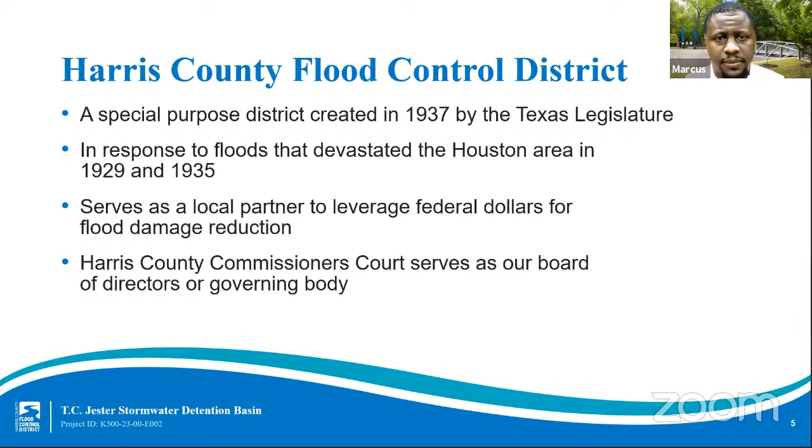The mission of the Harris County Flood Control District is to provide flood damage reduction projects that work with appropriate regard for community and natural values. One of the most difficult challenges we face is constructing effective projects that are sensitive to community and natural values in highly urbanized areas.

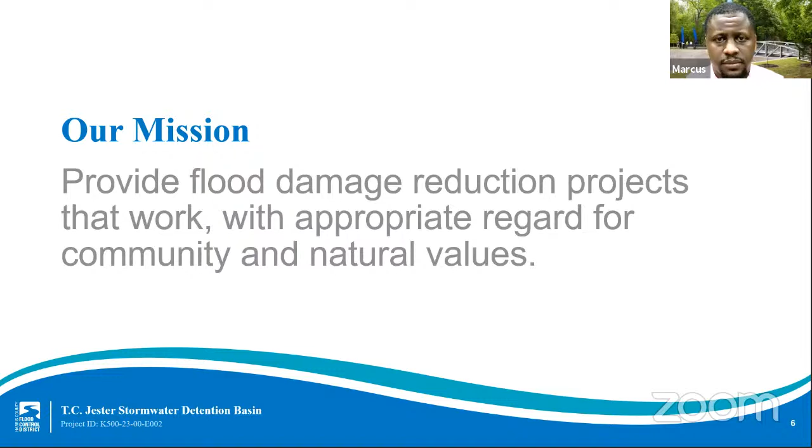Harris County includes 22 main watersheds, totaling approximately 1,800 square miles and more than 2,500 linear miles of channel. 2,500 miles is approximately the distance from New York to California. A watershed is a geographical region of land that drains to a channel or an outlet. Each watershed has its own unique characteristics and needs. The project we're presenting tonight is in the Cypress Creek watershed.

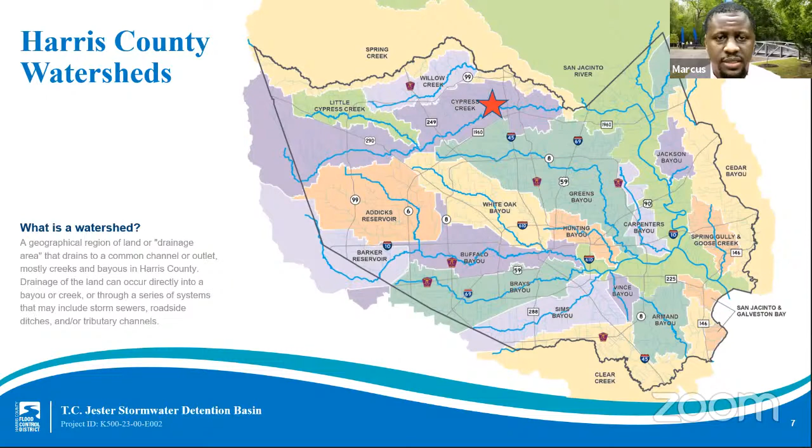Our area is flood prone, and here are some reasons why. We experience extreme rainfalls, including tropical storms and hurricanes. We have flat, slow draining topography, and we have clay soils that do not easily soak up excess rainfall.

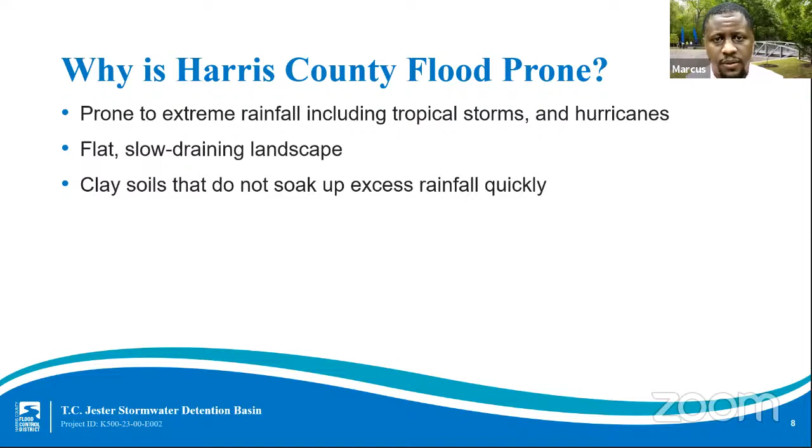When storm sewers are increased, this increases runoff. Since it is our policy to avoid impacts to downstream properties, detention basins help to safely take in and temporarily store excess stormwater during heavy rain events. Often, we partner with Harris County precincts, utility districts, and others to add recreational amenities such as trails to these basins and along our channels.

On August 25th, 2018, Harris County voters approved $2.5 billion for flood risk reduction projects. This vote followed a series of meetings across Harris County in each watershed, which resulted in a list of what is now 181 bond projects. 160 of those 181 bond projects have been initiated so far, including 12 projects in the Cypress Creek watershed.

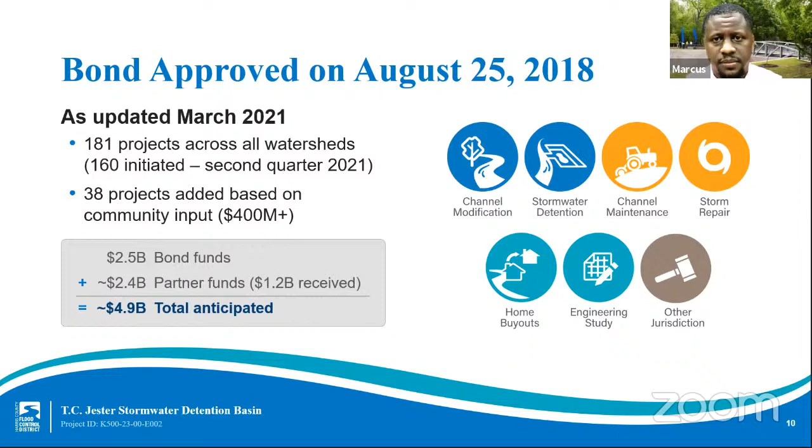While the bond was for $2.5 billion, the full cost to construct every project in the bond table is almost $5 billion. So we made it clear from the outset that we would need partner funding to fully construct the projects in the bond program. And as I mentioned previously, we've had some success with obtaining $1.2 billion in partner funds.

As this graphic illustrates, it shows the many sources of partnership funding, including federal, state, and local funding the Harris County Flood Control District is working to secure for Harris County. Each agency has its own definition of eligible projects and its own requirements for local match funding. So the Flood Control District is working diligently to match projects to the right partnership opportunities.

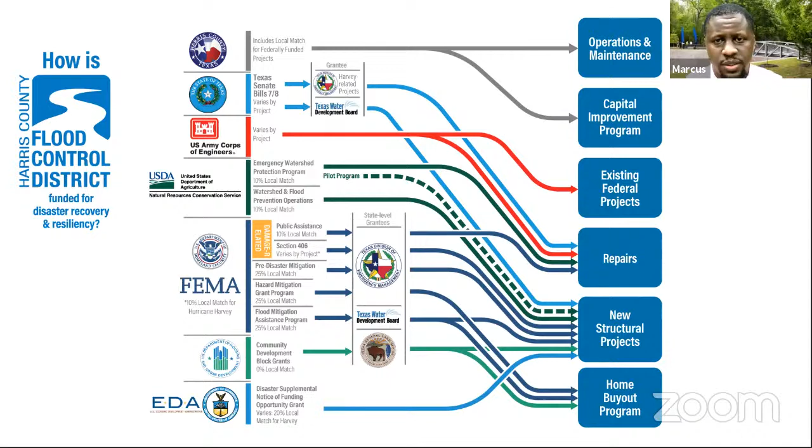We'll now move into the part of the program that's specific to the Cypress Creek watershed and TC Jester Stormwater Detention Basin. As with much of our region, this watershed has historically experienced storm events that produce heavy rains and cause frequent flooding. Most recently, as you may remember, flooding of Hurricane Harvey in August 2017. In the Cypress Creek watershed, the 4-day Harvey rainfall total was 29.3 inches, which resulted in record flooding along Cypress Creek and many of its tributaries.

The Cypress Creek watershed is also one of the most highly developed in the county, and much of that development occurred before regulations around on-site stormwater detention were in place. This creates a unique challenge when proposing flood risk reduction projects in the area.

A regional study for Cypress Creek watershed found flooding along tributaries of Cypress Creek is predominantly caused by the rising of Cypress Creek and backing up into those tributaries, not the lack of sufficient stormwater conveyance or drainage capacity by the tributaries themselves. Therefore, the study recommended nearly 25,000 acre-feet of additional stormwater detention in the watershed to reduce that backwater issue.

We're often asked, why don't we simply enlarge Cypress Creek itself? The answer is complicated, but basically it's because it's a federally protected natural stream. Widening or deepening it would be very expensive for multiple reasons and would require buying out and demolishing homes and businesses all along the creek, which is very disruptive for the community.

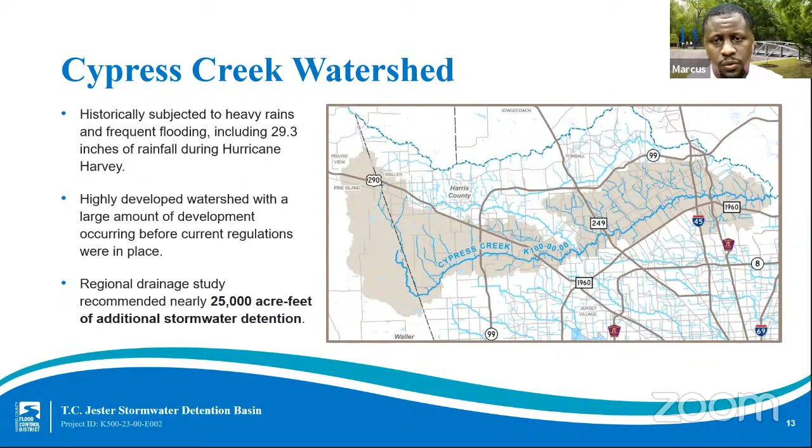Because the previously mentioned study recommends 25,000 acre-feet of detention, we're primarily focused on constructing stormwater detention in the Cypress Creek watershed. Of course, being such a developed watershed, we also acquire right-of-way wherever we can along the creek to preserve and restore natural floodplains or for future projects. The Cypress Creek watershed has its own bond ID for right-of-way acquisition.

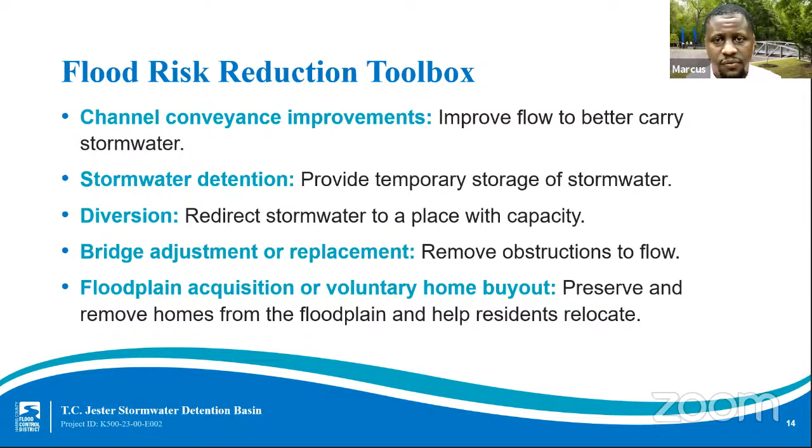A stormwater detention basin is built to store excess stormwater until it can safely make its way back into the channel and then ultimately to Galveston Bay. There are several ways stormwater will fill the basin, but all of our structures are passive designs that utilize gravity to operate, so there are no mechanical pumps or gates.

The flood control district typically constructs two types of basins, wet bottom and dry bottom. Both wet and dry bottom fill up during heavy rain events and then drain out as the receiving channel recedes. The difference is that one has a permanent pool and the other one has a dry, grassy bottom. A wet bottom, which is what we're recommending for this project, typically has a permanent pool of water and can provide habitat for a variety of wildlife.

So sometimes we're asked, how can a basin full of water hold more water? The answer is that the basin is not full. The basin is excavated down to a natural water table, which provides that permanent pool. The space storing the stormwater is above the natural water table up to the top of bank of the basin.

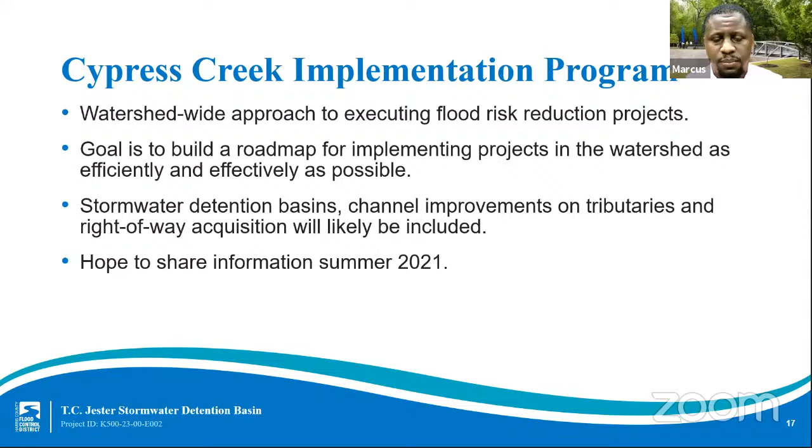Projects will include stormwater detention basins, channel improvements along various Cypress Creek tributaries, and right-of-way acquisition for floodplain preservation or for future projects. To move projects quickly and efficiently, the flood control district is moving forward wherever possible, beginning with efforts around and on land that we already own. We hope to share more information on the implementation report sometime this summer. The report will lay out the prioritization of projects and the next steps in the watershed.

Now we can turn to the specifics of the projects that we're here to discuss tonight. As I previously mentioned, as part of our approach to the Cypress Creek watershed, the flood control district is prioritizing projects on property it owns, which is the case here. The flood control district owns approximately 171 acres of land at TC Jester and Cypress Creek, south of Cypress Wood Drive. The flood control district purchased this property to preserve it from future development. Funds from the 2018 bond program allowed us to begin the project life cycle.

The efforts on this site are split into two projects, one west of TC Jester Boulevard and one east of TC Jester Boulevard. The property west of TC Jester Boulevard is currently under an excavation and removal contract, which allows a contractor to dig up soil for their own use. This is a low-cost contract to the flood control district, and as of today, the contractor has excavated approximately 1,600 cubic yards of soil. Tonight, we're discussing the approach for the east side of TC Jester.

In May 2020, following Harris County Commissioners Court approval of an agreement with an engineering consultant, the flood control district initiated a preliminary engineering stage for this section of its property. During this stage, engineers examined and modeled alternatives for stormwater detention basins. These alternatives balance needed stormwater detention with a myriad of other concerns such as environmental regulations, conflicts with pipelines and other utilities, and community values. At the end of this stage, the project team will produce a preliminary engineering report that will include 3 alternatives for a stormwater detention basin and a recommendation of the most beneficial alternative.

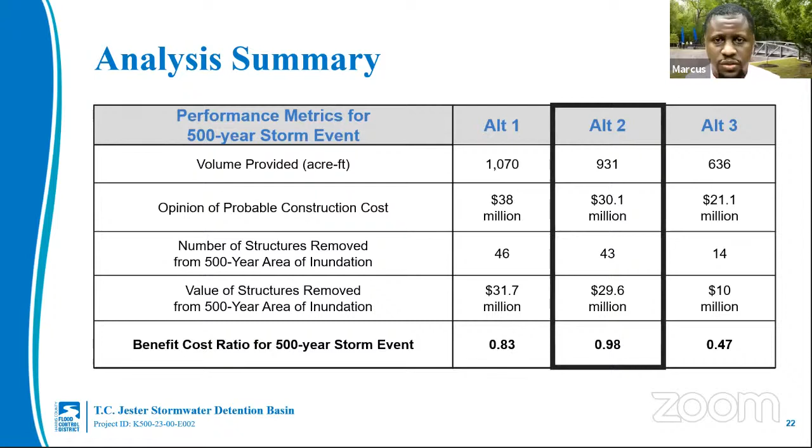As previously mentioned, the recommended alternative would hold 930 acre-feet of stormwater. To give you an idea of about how much 930 acre-feet of stormwater is, a standard football field is about an acre in size. Now think of that football field covered with 1 foot of standing water. That volume is 1 acre-foot. 1 acre-foot is approximately 326,000 gallons of water. Therefore, we expect approximately 303 million gallons of stormwater within the proposed TC Jester Stormwater Detention Basin with the alternative 2 design.

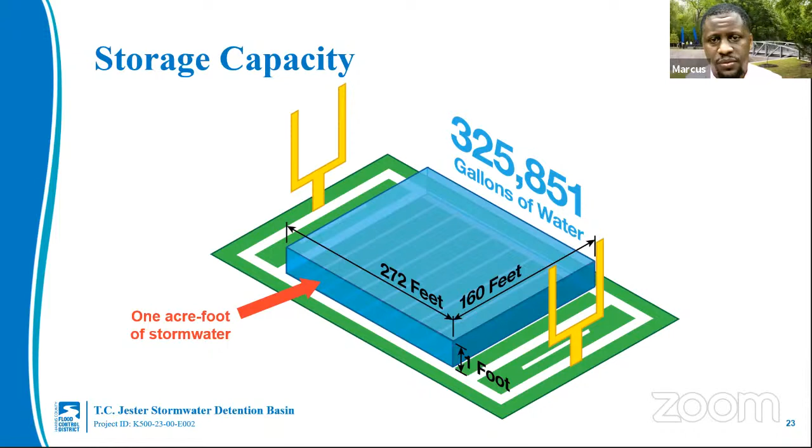We know that this property is of high interest to walkers and bikers. Our agency does not build nor maintain trails or other recreational amenities, but we often partner with other agencies that do in order to make the site multi-purpose. The Flood Control District's mission is to provide flood damage reduction projects that work with appropriate regard for community and natural values. This property will first and foremost be used for flood mitigation. Any recreational amenities or trails will have to accommodate the detention for the basin.

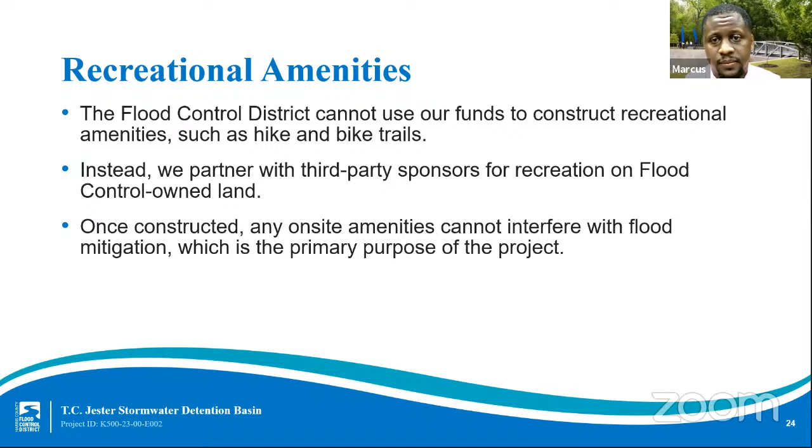Comments from this meeting will be considered and incorporated into the preliminary engineering report for this project as appropriate. In the next few months, the preliminary engineering report will be completed and sent to Harris County Commissioners Court for their approval. Once the preliminary engineering report is approved, the project will move into final design, which will take about a year. Once funding is obtained, construction will begin. This could be no earlier than late 2022, pending funding. This project is funded through the design stage, which, as we mentioned, is likely to be about a year. We're looking at all available opportunities for funding the construction stage of this effort, including partnership opportunities.

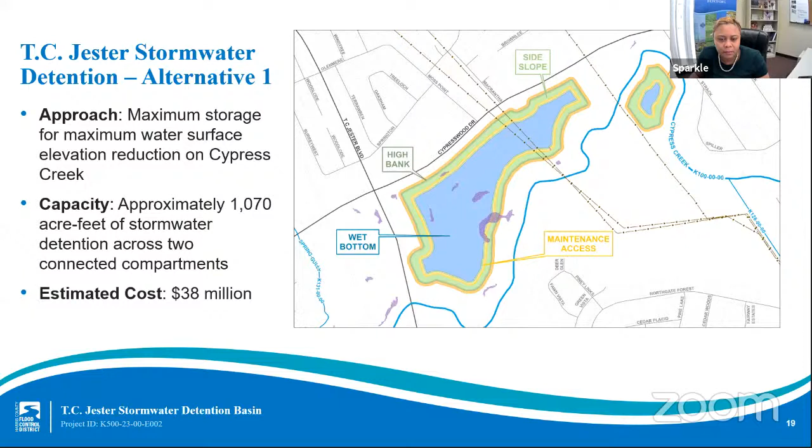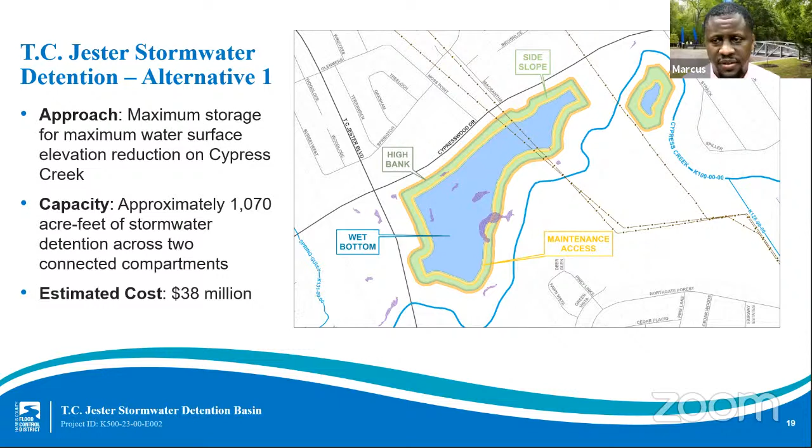All right, Marcus, would you please provide another overview of the comparison of the 3 alternatives, the cost and the structures? Sure. So alternative 1, we're looking at approximately 1,070 acre feet, and it'll be split into 2 connected compartments. And the estimated cost for that is $38 million. This is our largest alternative that provides us with the most reduction and the most benefit. And we can move to alternative 2.

And of course, the last option we looked at was the smallest, with about 640 acre feet of stormwater detention, and pretty much followed along the same concept, trying to avoid as much wetlands as we can. But we also removed the detention basin that was on the east side of the pipeline. And so the reduced cost there takes it to 21.1 million. All right, thank you so much for that, Marcus.

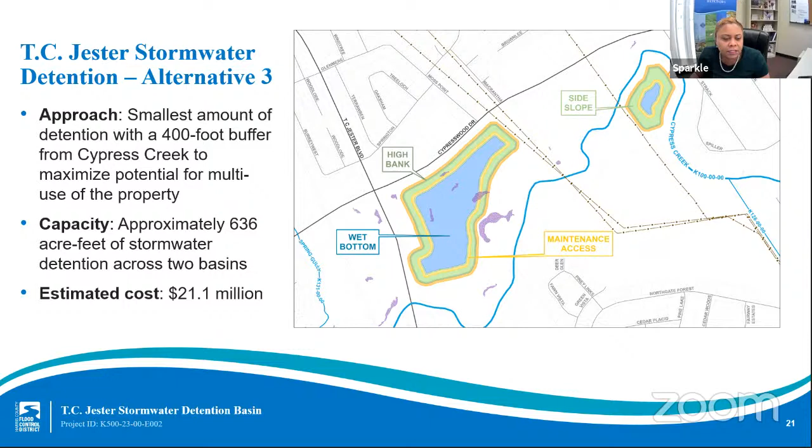Our next question is from Grant, and he would like additional information on the estimated timelines for the start of construction on this project, which is east of TC Jester. So estimated timeline, right now we're saying no later than 2022. So tonight we're here to present the alternatives that we have for preliminary engineering, gather your input, and then take that information to produce a final preliminary engineering report, which we will take to the Harris County Commissioners Court for approval. And then at that point, we can start the design stage. Right now, we're saying that design stage takes roughly about a year. It could be less. So right now, we're estimating that construction won't begin any later than 2022.

All right, Marcus, this next question is for you as well. Deborah would like to know if there's any property acquisition associated with this project. There is no property acquisition associated with this project. All of the properties that we're working on, the one I mentioned previously, which is on the west side of TC Jester, is property that the Flood Control District owns, and the property on the east side is property that Flood Control District owns.

And so what I want to clarify is when I mentioned the 43 or so structures, those are the structures that benefit from the project. So by us incorporating the recommended alternative, it reduces the water surface elevation in the 500-year such that roughly 43 properties receive benefit. With that, we applied a cost to each one of those structures. That's to say if there was a flood and the home received 6 inches of water, and now the water surface elevation is reduced, let's say 6 inches, then those properties receive benefit from flooding. Had we not put the project in place, those homes would have had to pay for some sort of damages, and that's how we came up with the benefit of those properties.

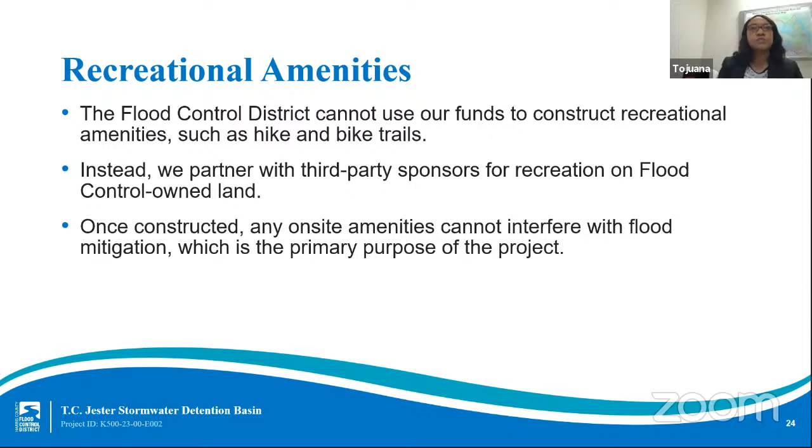Okay, the Flood Control District begins taking into consideration utilities during the preliminary engineering phase, which is the phase that we're in right now. Now, once we have decided upon a recommended alternative and that alternative is accepted, we will begin during the design phase coordinating and reaching out to those utility owners to inform them about our project and to also gather information about their project and find out things such as what potential impacts our construction traffic might have on their particular pipelines and what type of protection is needed.

And all of that information will be gathered during the design phase and taken into consideration in design of our stormwater detention basin so that we will not adversely impact their utilities. If their utilities need to be relocated, we will coordinate with them concerning that too. But that will generally start during the design phase after we have decided upon the recommended alternative and that has been approved. All right, thank you so much.

Marcus, this next question is for you. What are the benefits of a forested buffer on Cypress Creek? So actually, there are a few. So one of the primary reasons for a buffer is the area that runs along Cypress Creek, just because of the soil types, it's better to leave that vegetation that's already there, that's grown, that's thick, that holds the soil together. So if you start to move that out too quickly without doing some sort of improvements to the channel along the slopes of Cypress Creek, you run the risk of destabilizing what's already a stable zone.

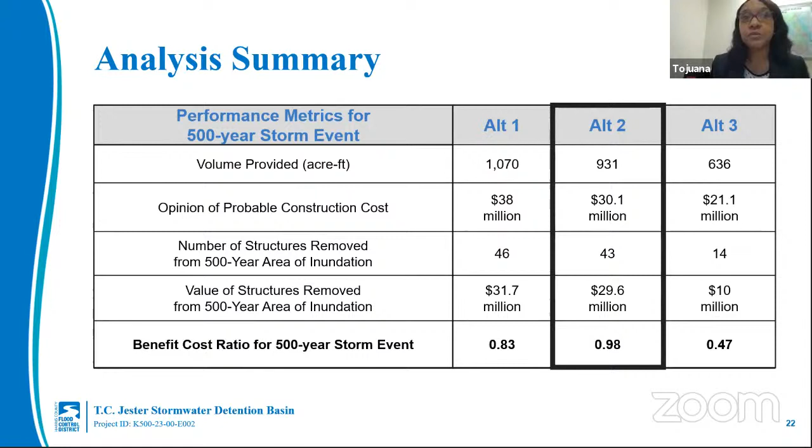So the engineer makes a recommendation based on the cost as well as what our objective is for the project and the value of the structures that will benefit from the project. Once they make that recommendation, we, the flood control district, evaluate that recommendation. And then we also take into consideration your input. That's why we're having this meeting tonight. We're sharing with you that the recommended alternative is alternative number 2, but we want to hear from you because we also want to take your values into consideration for this project.

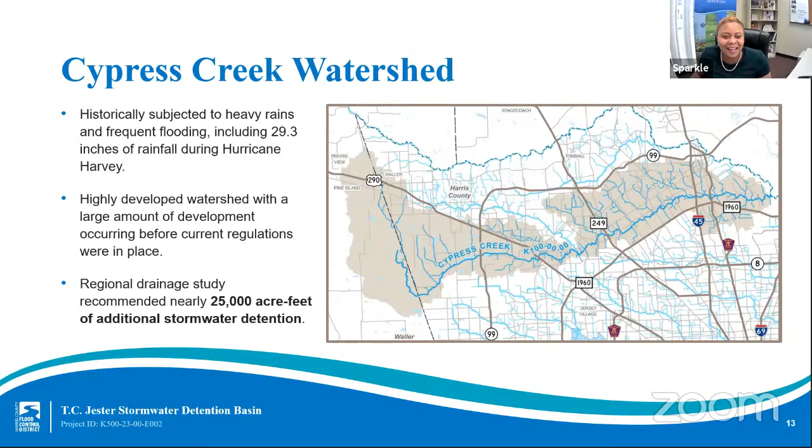All right, thank you so much for that, Tojuana. Our next question is from John. He wants to know if the flood control district's stated preference for gravity drainage design for stormwater detention basins due to certain details of the topography of Harris County are based on an effort to eliminate the possible failure points introduced with mechanical designs. That's a long question there. Tojuana and/or Marcus, would you like to take that one?

Yes, I will take that long question. Thanks, John. So yeah, our primary thing is to try to make sure that all basins that we do are gravity drained. And the primary reason is, as you stated, pumps. You have issues if they fail, then you always have to have someone available to go out and make sure that it's continuing to move, so that way it can continue to function. The same thing with the gate. You typically have to have someone go out there to make sure that the mechanical gates are opening as they should.

And so, yeah, it's just one of the things where if we make sure that it's gravity and we put in our weirs at proper elevations, then the water comes in and it goes out, and it creates less of a risk of a clogging situation or some type of failure that could potentially make things worse. All right, thank you so much for that.

Tojuana, I think you wanted to provide some additional context to one of your earlier answers. What was that? On the PER? Oh, okay. Well, if there are any concerns about what happens with the PER after tonight, we're going to take into consideration the input that we get from you, the public, and we do appreciate you being here and participating tonight. Then we'll work with the consulting engineer to find out if there are any adjustments that need to be made to the preliminary engineering report, and if there are, those adjustments will be made.

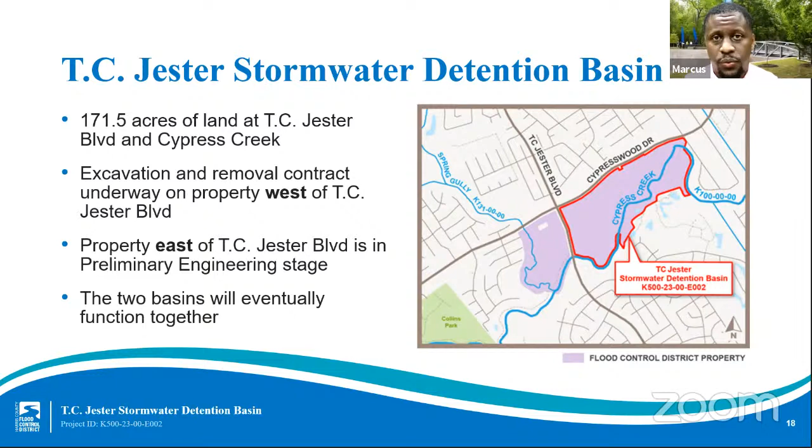Yeah, so similar to what I was explaining to Jim, this project is funded through the preliminary engineering and through the design. The construction funding did not come through as we anticipated and as we hoped. So at this point, there's work that still needs to be done before we get to the construction phase. So right now we're doing that work, what we call the inside work, in hopes that over the course of the next year to year and a half, we secure the funding so that we can do the construction project.

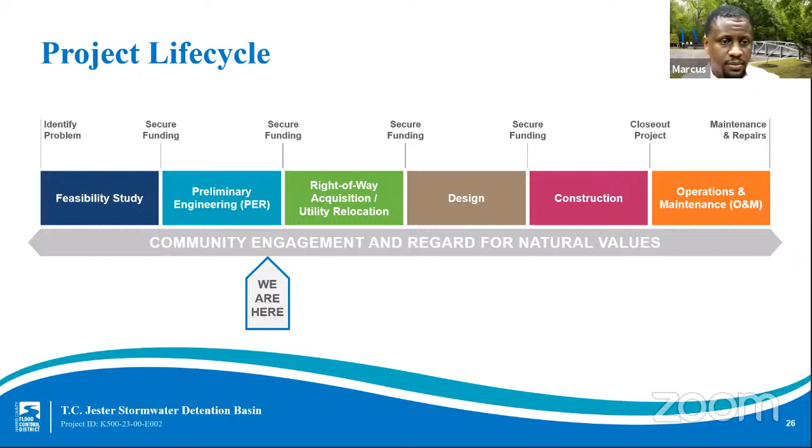All right, thank you for that. Tojuana, Kent has a question about where the weirs would be located. The exact location of the weirs will be determined during the design phase. If we could pull up the exhibit, they may show some preliminary locations for outfalls. Can we go back to that page of the presentation? Tojuana, do you know what slide that is? No, I really don't. So can we get back with Kent later on with more information about that? But that is determined definitely during the design phase, although we may have some preliminary information for the outfall locations now. All right, absolutely.

Okay, and we received a comment from Jeff who says he really appreciates our presentation tonight and the work we've done on this project. You have my support, and I'm really excited to see this project move forward as you described. Great job. And again, thanks, Jeff. Thank you. It's always nice to hear that good feedback. We appreciate you for taking time tonight away from your friends and family to hear this presentation and understand what's happening in your community.

All right, Marcus, we are receiving some questions about mosquitoes and are those attracted to wet bottoms or what types of basins? Can you talk a little bit about the mosquito issue?

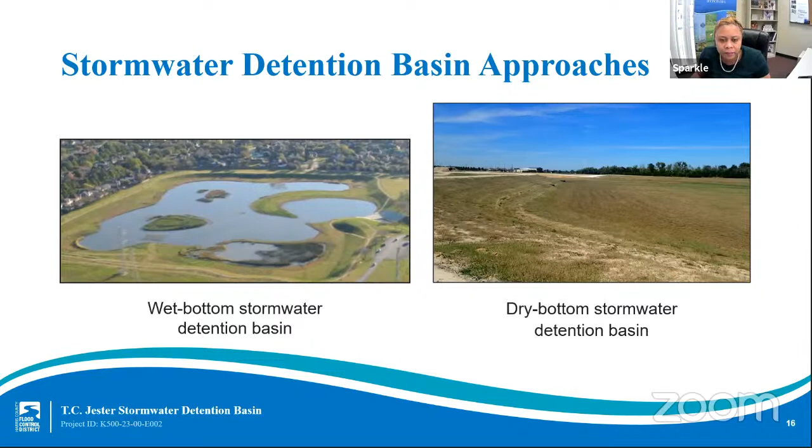All right, thank you. And Marcus, I know you answered the question earlier about the forested buffer on Cypress Creek, but would you share that information again? We're receiving some additional questions. Yeah, so as I said earlier, the primary purpose for that forested buffer is to create a riparian zone. Because we aren't doing any channel improvements on Cypress Creek, if we were to completely clear along the channel like that, it could create a potential destabilization of the banks. And so we didn't want to create that effect along Cypress Creek, with not being able to do any channel improvements.

Also, another benefit of having that riparian barrier is that it could be used for amenities, trails, bike paths, and things like that. I think there's a location on Cypress Creek that has a Frisbee golf course. So that riparian buffer and those wooded areas that we provided will allow there to be some public use of the facility, of course, again, by some other third-party sponsor.

Also, the buffers along Cypress Wood and TC Jester give the neighborhood and the area still that natural feel, because as you're driving down Cypress Wood Drive or TC Jester, you don't see, 30 feet off the edge of the road, a huge hole or detention basin. So it kind of helps build a natural feel that Cypress Creek has anyway, because it is a natural channel. And we just want to make sure we take those things into consideration.

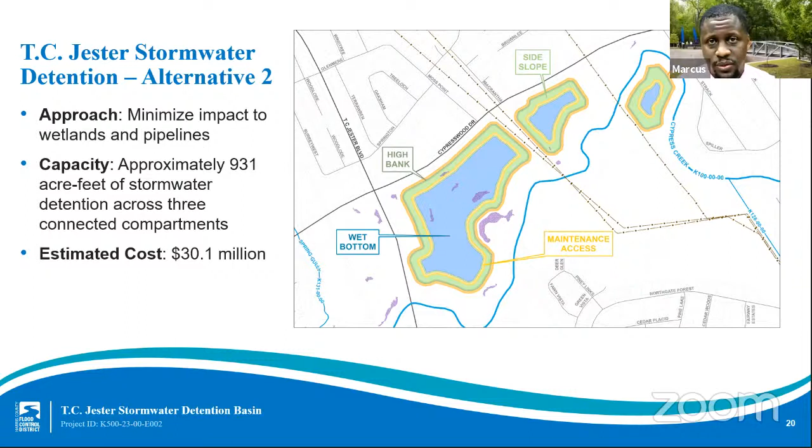And with that, that's the end of our evening. I'd like to share one final reminder that we are continuing to accept comments and feedback on this project through June 30th. We also encourage everyone to get flood insurance, as flood season in Harris County runs year-round.